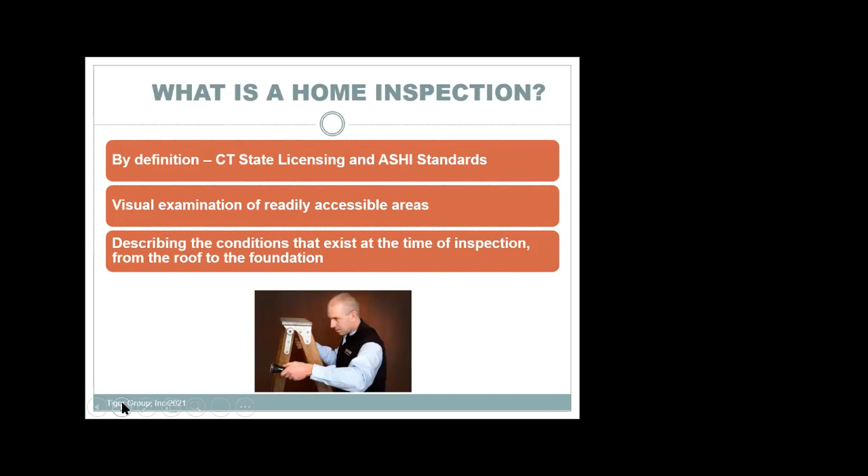So with respect to the home inspection, by definition, our inspections in the state of Connecticut are following the standards that have been put forth by the state of Connecticut, which were adopted from the ASHI standards. ASHI is an acronym for the American Society of Home Inspectors, a professional organization that some inspectors subscribe to.

Obviously, we are conducting a visual examination. Notice that it talks about readily accessible areas. One of the things that you will receive today as part of this presentation at the end is a set of standards for the state of Connecticut. And in that set of standards, there is a glossary that talks about those things like readily accessible areas, which is really important that clients understand because we aren't able to do certain things.

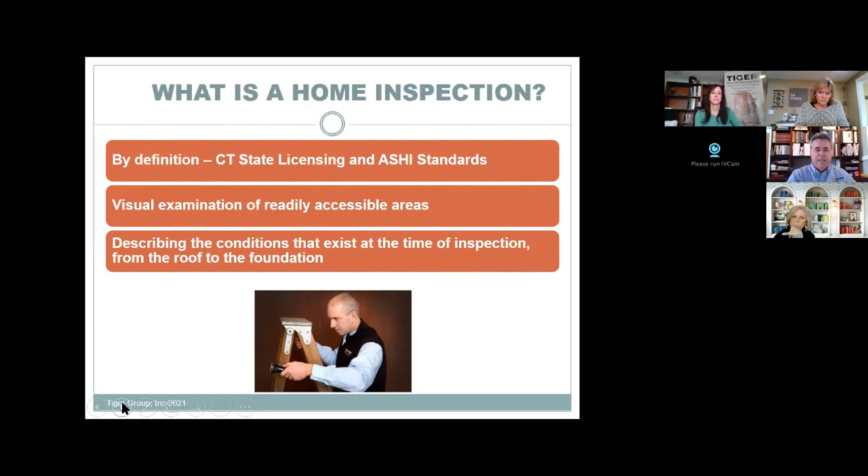I mean, we can tell them what we can see. We can't tell them what we can't see, is what it comes down to. And then obviously we are describing the conditions as they are on the day of the inspection. We do try to anticipate what may happen in the future as part of a normal aging process for a component or a system, but we are really looking at what the conditions are at this point in time for the inspection.

We are regulated just as you are by the Department of Consumer Protection. The goal of the standards is to provide a minimum and uniform standard. So notice it says minimum. You can always do more, right?

It's kind of like the building code. The building code defines what it is that you will do as a minimum to build a house. The inspection standards define what it is as a minimum that you will do for an inspection.

Those standards are required to be provided to a client at the time of the inspection. At Tiger Group, we do send those to our clients in advance so they have an opportunity to look at those. And just as your realtor licensing requires, we have a code of ethics to follow. All of that information will be included in the packet that you'll receive after this seminar today.

So we're here to provide some education for these folks, help them understand how these systems interact. What's the yin and the yang between the air conditioning and the heating system, for example. Talk about where all the controls are. If they have a leak in the house, what are they going to do? That type of thing. Super important for these folks to understand.

We're going to talk about things that are significantly deficient. So again, that's going to go back to that glossary of terms. The state defines what is significantly deficient or at the end of its useful life. And those are really important criteria for us to pass along to our clients.

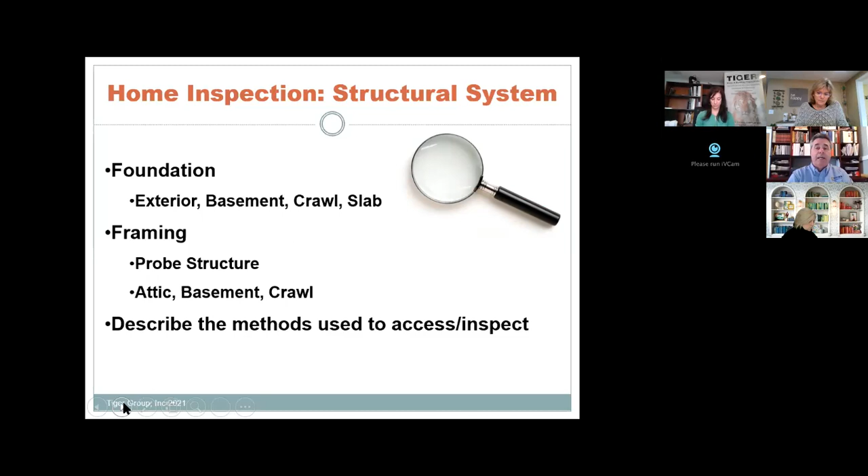It says in the standards, if I'm inspecting a roof, for example, how did I inspect that roof? Did I do it from the ground? Did I do it from a ladder? Was I on the roof? And then I'm required to describe the materials that are in there.

So all of those things are all spelled out for us in the standards. It will speak to all of the exterior components which are listed here. We're going to talk about all the siding, the trim on the building, any of the roof covering or chimneys, porches, deck additions, that type of thing, and anything that's related to the house.

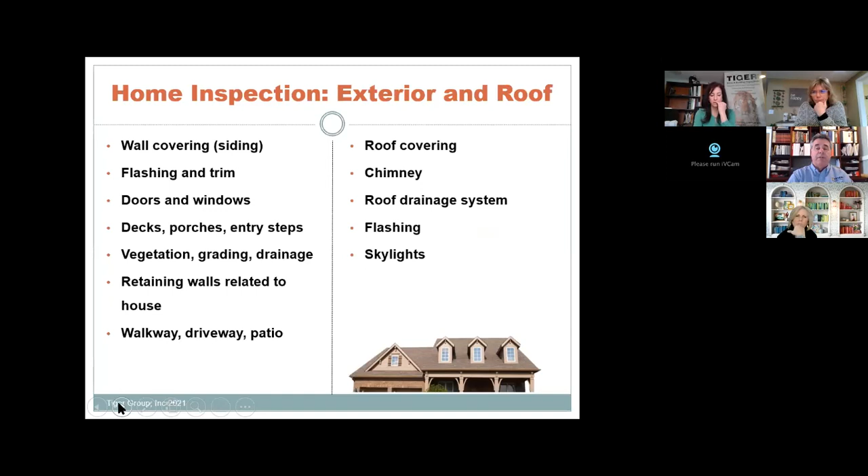So for example, the site drainage as it relates to the house. Now you may have a site drainage issue that doesn't affect the house. That may or may not necessarily be important for home inspection purposes. But if it's a situation where the drainage is a reverse grade situation, for example, and it's creating a problem for the house, then certainly we would speak to that.

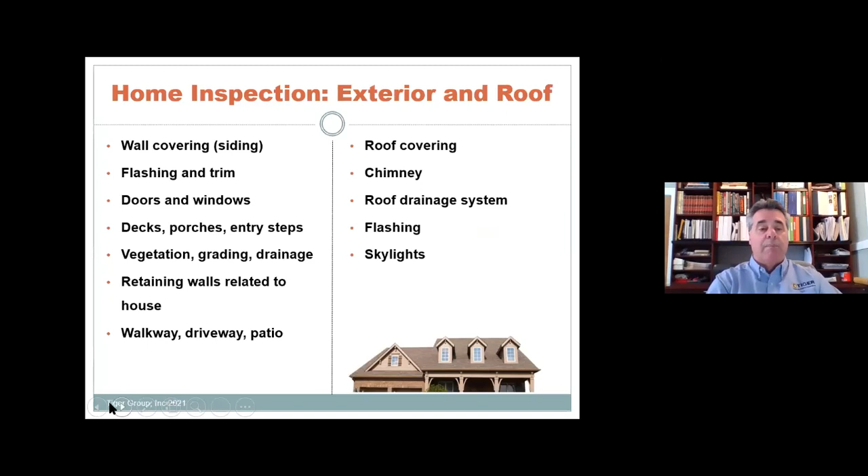Same would be true for a retaining wall. You may have a retaining wall on the property that really doesn't have anything to do with the house, for example. With respect to the systems and components within the house, we're going to talk about the supply and distribution system.

Again, we are required to define some of these things for clients. So what type of water supply system do we have, for example, and waste disposal system? The types of materials that are in the building will be reported as well, as would be the type of water heating equipment, any fuel storage or distribution system.

So for example, are we a natural gas system? Do we have oil tanks? Do we have above ground tanks, below ground tanks, that type of thing. It talks about sump pumps and systems, and obviously we would have as detailed a conversation as we can about that.

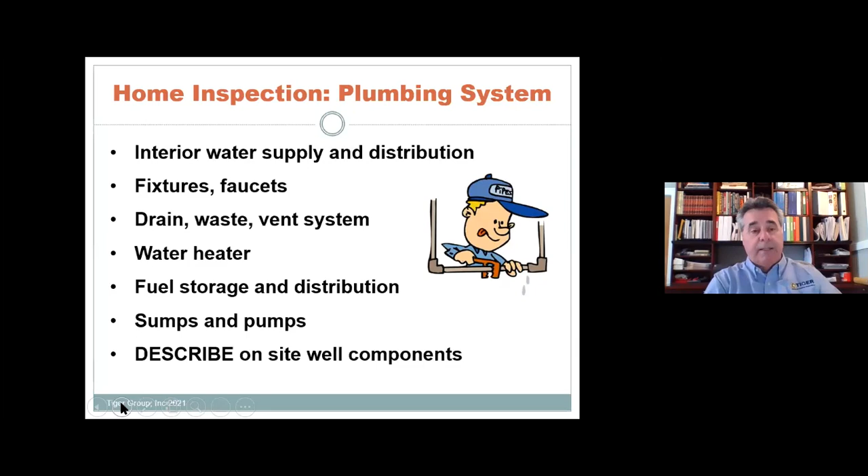And also notice it says to describe the on-site well components. It's interesting because the state really tells us what we're going to inspect versus what we're going to describe. And when it comes to the well equipment system, it really doesn't talk about inspection. It talks about a description. So we have to kind of wade through some of these conversations with our clients.

With respect to the electrical systems, we're basically going to start from the exterior and go right through the building and figure out, okay, from our service entry down to our last switch or receptacle, how do we go through and look at those systems?

Notice it says representative number of fixtures or switches, outlets, and GFCIs in the house. So the standard acknowledges the fact that we may not be able to get to everything in the building. Rest assured, we're going to try to get to whatever we can, but we are inspectors, we're not movers. So if there are things that are in the way, then we're going to talk about that with the client and help them understand the limitations of what we may or may not be able to do.

Also, it speaks to smoke detectors. The standard is very specific with regard to smoke and CO detectors and acknowledges the fact that we really can't verify if these systems are functional. Rather, we're required to identify the presence or absence of them.

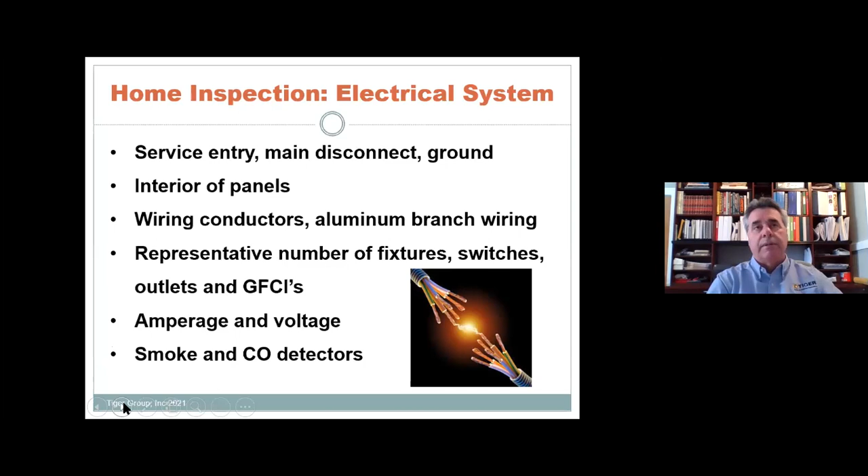And also, with respect to ground fault circuit interrupters, we're required to state whether they're present or absent in areas that we would expect them to be, which would be areas near water. So think exterior of the building, garage, basement, kitchen, bathroom locations, that type of thing.

With respect to the heating and cooling equipment, it talks about installed equipment. So there, for example, we wouldn't be looking at uninstalled equipment, which might be a space heater. I was in a house the other day, it had a plug-in electric fireplace in the house. So that's not an installed system. That's a portable system, which somebody could just pick up and take with them. So that kind of begs a conversation on site as to, okay, what are we doing with this? Is this staying? Would you like me to look at it, not look at it?

With respect to cooling systems, it speaks to central and through wall systems. So that excludes a window installed air conditioner, for example. So we're really kind of parsing that conversation so that people understand what we're doing and not doing.

It speaks about vents, flues, and chimneys, and then it goes on to say that we're not required to inspect the interior of flues and chimneys that are not readily accessible. So the standard acknowledges that we may have some limitations, or there may be some specialized procedures or equipment that would be involved in being able to fully assess that.

We would have that conversation with a client on site. It speaks to the adequacy, distribution, and balance of systems in a house. I was yesterday in a condominium, a townhouse, and we were on the first floor, and I turned on the heat, and it was 67 degrees at the thermostat. We went upstairs, and it was about 75 degrees up there. I'm sure you've experienced that yourself, where certain building styles won't have a balance throughout the house. So we had conversations about what that means to the occupants and their comfort levels, and what strategies they might employ to make adjustments while living in the building. Those are all really important conversations to have with clients.

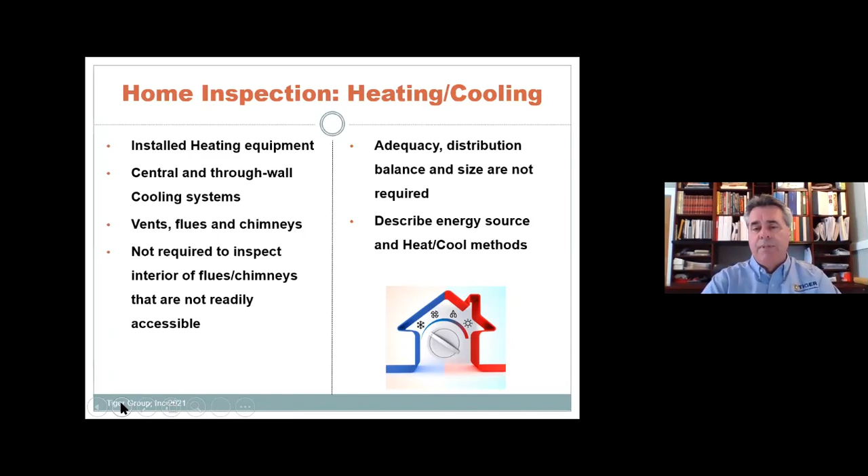We're also required to describe the energy source. Is it natural gas? Is it oil? Is it electric? That type of thing. It may seem somewhat redundant to have some of these conversations, but they're part of the standard, so we need to have them with clients so they understand what we're doing and what we're not doing.

With respect to insulation and ventilation, it speaks to describing the type of insulation we're using in the building, and identifying vapor retarders. It tells us we're not required to move insulation. Sometimes the standards are at odds with each other, which makes it a little confusing for clients who may be reading the standards. So we need to have those conversations and help them understand the intent of the standard.

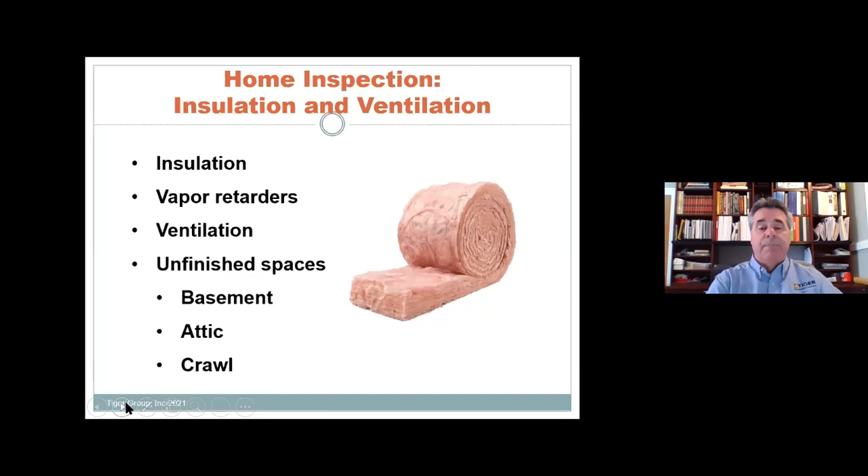It talks about ventilation, and then we're required to look for insulation and ventilation conditions in any unfinished areas, which would be the basement, attic, and crawl space locations.

With respect to the interior locations, we're going through the rooms, looking at windows, doors, outlets, walls, ceilings, floors, going through the individual rooms, and then of course the bathrooms and kitchens, which have additional components like water fixtures or appliances.

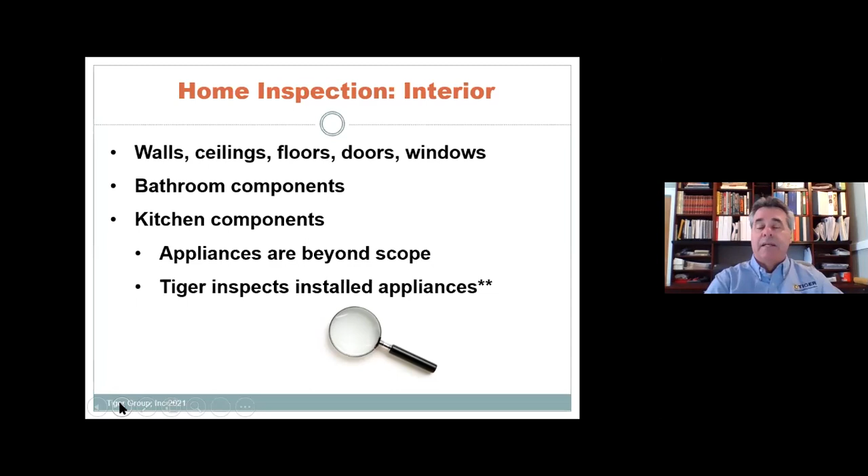With respect to appliances, the standard talks about the fact that appliances are beyond the scope of the inspection, which they are. Again, we'll try to do whatever we can. We do inspect installed appliances, those things bolted to the building, like a dishwasher or a disposer. Laundry equipment and refrigerators aren't necessarily attached to the building, so the standard recognizes those may not be systems that stay with the house—they may be leaving. But again, that's a conversation we can have on site.

Fireplaces, to the degree that we can inspect one—we're able to look at the hearth face, the hearth extension, the firebox, the damper, and part of the smoke chamber, and that's about it. You're not necessarily going to be able to see too far up into the liner assembly, and that's really where our job stops and that of a chimney sweep would begin. So we'd have that conversation with clients.

And then the solid fuel appliances—wood, pellet—and of course gas appliances. We don't have a lot of kerosene systems, but that could be part of this conversation as well. Again, it talks about accessibility, and the requirement, or not required, I should say, to ignite or determine draft or move appliances.

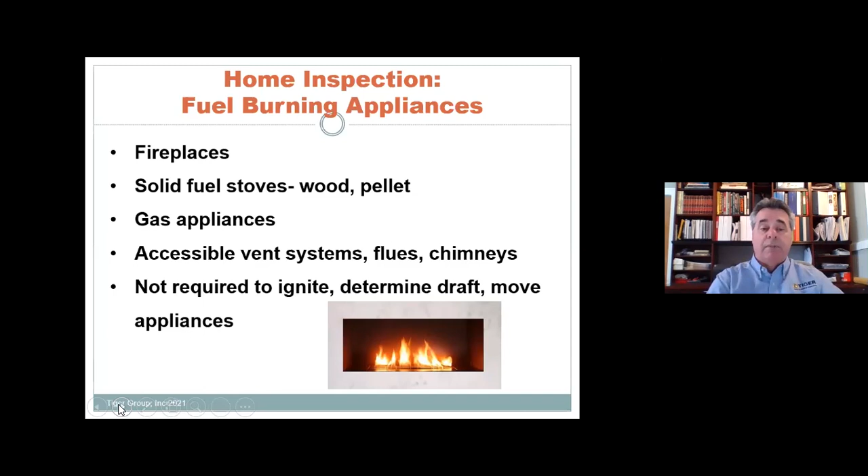Very frequently, and I'm sure many of you have experienced this, you'll go into a house where a gas appliance, or maybe a pellet stove, is not in operation. As inspectors, we're going to inspect it as it sits—we're not necessarily going to light that. If it's something with a simple remote control, we'll absolutely do that, but systems that are shut down we have to approach with caution. We have to remember we're in an unfamiliar environment, and we don't know why that gas valve is shut off for that appliance. So we're not going to take a risk of starting something and perhaps having a problem on site. We're going to report that condition as we find it, and have a client conversation so they understand the limitations of what we can and cannot do. So those are the basic things for the home inspection.

When we get to the wood destroying insect inspection, you'll find that this is not uniform. The wood destroying insect inspection is not part of a home inspection—it's not covered by the home inspection standards.

It's covered by a separate set of standards, and Sue alluded to this earlier. So for purposes of our conversation, a wood destroying insect is going to be a termite, a carpenter ant, a carpenter bee, or a powder post beetle. Those are categorized as reinfesting insects.

The oversight for that licensing-wise is going to be, in the state of Connecticut, a supervisory license. The standard essentially is the same whether you're an individual doing this as part of a home inspection, or if you're doing it as a pest control operator working for a pest control company. The licensing standard is going to be the same. You're going to have a supervisor license, and then you're going to have an operator license. The operators are allowed to do the inspection. They're not necessarily allowed to apply chemicals, and that's the way the program is set up in the state of Connecticut.

So you'll find that some home inspection companies do not do wood destroying insect inspections. Rather, they don't do them at all, or they may have a half measure where they bring a licensed pest control operator with them to do the inspection, or they may just simply say, I'll tell you what I can see, but if I don't see anything, then that's the answer. We've made a decision as an organization that we are inspecting the house anyhow. We are required to know what the structure looks like and determine its condition. So it kind of makes sense to do the wood destroying insect inspection as part of that overall inspection.

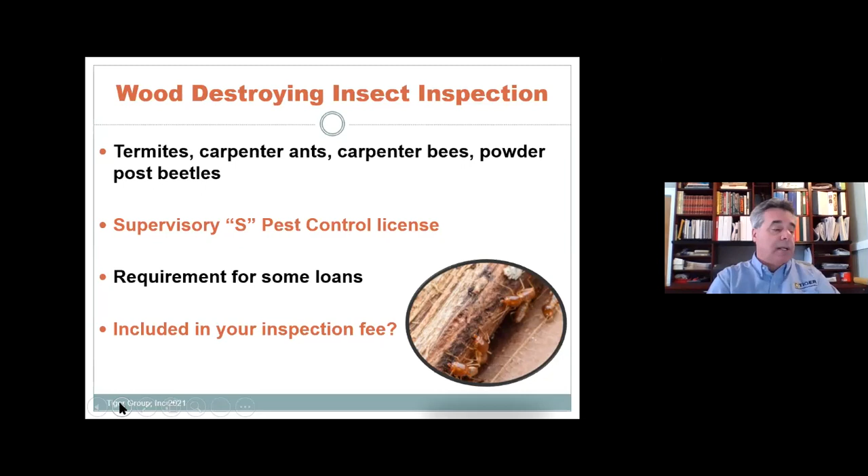The other question would be, is it a requirement for a loan? Well, we don't know the answer to that. Only you and your client would know the answer to that. And then also the question you'd want to ask is, is it included in the inspection fee? Because again, it's not covered by the home inspection standards, so it may or may not be.

So the important parts of the conversation here are that we explain to the client what it is that we're finding, what it means to them, and then give them some direction with regard to: does this particular condition require monitoring? Does it require some action on their part? Is it functionally at the end of its life, or some other way deficient? Those would be important things we would need to go through with them. We're going to talk about simple maintenance things, and we will try to segregate those conversations for clients. And then when it's warranted, we're going to make recommendations for further evaluation.

So when does that come into play? In a lot of people's opinion, too often it comes into play, and I'm kind of on the same table with that. So think of the example I gave you about the fireplace. I can tell you what the exterior fireplace looks like. I can tell you what the exterior of the chimney looks like. I can tell you what the base of the chimney looks like. I can tell you about the fireplace, the firebox, the damper assembly. But there's a whole big part of the inside of that chimney that I can't tell you anything about.

So now I'm looking for clues, right? I'm going to look for some signs that there may be something happening inside that chimney. That may be readily apparent from the exterior, where I may see some cracks or other type of deterioration. Or perhaps in the fireplace, when I open up the damper, maybe there's a level of deterioration or something else happening in there. Those would be the times we would say, legitimately, listen, you need to get somebody else out here to take a look at this and figure out what may be happening at these areas that are not readily accessible at this point.

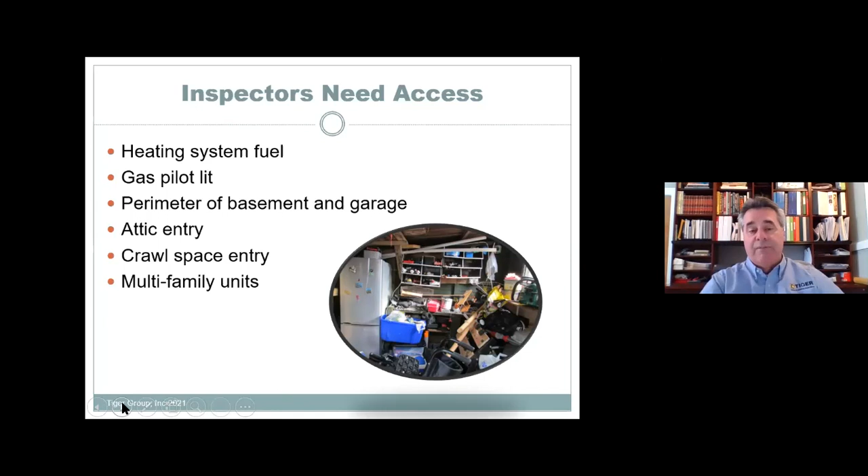Crawl spaces -- I don't know if you have a crawl space in your house, but ask yourself when the last time you were in it. Nobody goes in these places, and there's always all kinds of interesting stuff in there. Then tenant type situations, perhaps, where multifamily houses -- do we have access to all these things? About a shed out in the backyard, some people want to look at a shed. Maybe it's got a lock on it. Those would be important things to take a look at too.

And then, seasonal type situations -- what are we going to be able to do? As you probably already know, we're not going to be able to run air conditioners until probably the end of April, depending upon how the temperatures keep going.

Irrigation systems, maybe the end of March, depending upon when they get them started up. And the same thing would be true for pools.

With respect to snow covered areas, it's not a standard per se, but a company policy where we offer a free return to look at any snow covered areas for clients. We'll have that conversation with them on site and report our requirements to return. We're happy to go back and do a return visit for snow covered areas, provided that somebody calls us and lets us know when it's free of snow.

I got a call the other day from a client who drove by a house, a beautiful, pretty large house, and said there's no snow on the roof so you can go back out and check it. What we ask for is that phone call, and to give us 2-3 days to get out there, because we're not going to schedule that activity specially, we'll work it into our day-to-day activities. I got back out to the property, and yes, the front roof was free of snow. The rear roof had about an inch of ice on it and a few inches of snow still.

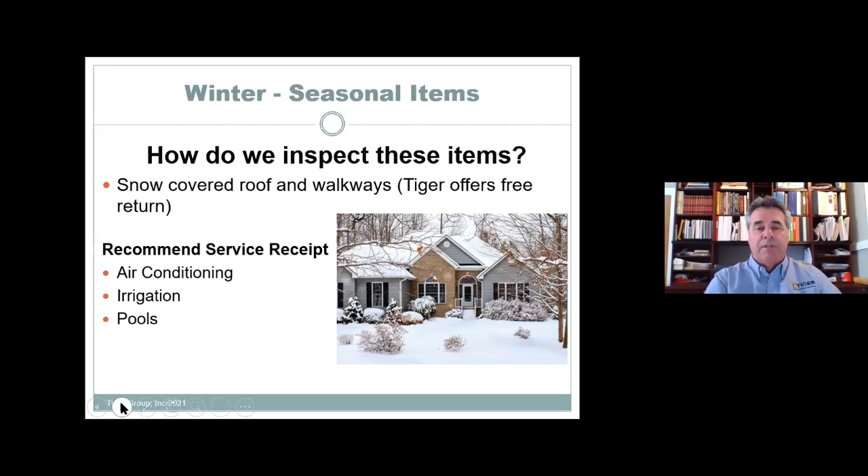Unfortunately, we can't as an organization continue to make return visits to things. So we do ask people to check, because we're happy to go back there, but we can't make multiple visits. Especially now, what's going to happen in the next couple of weeks, folks, we're just going to be as busy as all get out, and we're not going to be able to schedule those things. So the first time is the best time for us to get back out there.

So with regard to limitations, and there are limitations as we just touched on, anything that is not readily accessible, we're going to have some level of limitation to it. We're not going to do any destructive probing or dismantling. We don't own the house, and the client who may be buying the house typically doesn't own the house either, so we can't go in there and create physical damage to the building.

We will probe framing systems where we suspect there may be some deterioration, as part of our wood boring insect inspection, which any pest control operator would do. As we've talked about, we're not going to be able to move things. We can't really tell people what's happening inside a wall. We'll do our level best to help them understand what they may expect to find in there, but we can't see through walls, so we're not going to be able to tell them a whole lot about that.

Entering areas that are unsafe -- I had an inspection the other day, and the agent said, 'Hey Bill, good news, there's a big crawl space for you to get into.' I'm like, fantastic, I love crawl spaces. So I was all ready to go get my respirator and my Tyvek suit. And I said, let me just take a look in there first and see what we're dealing with.

Well, it was an old house, an addition off of an old house that had a stone foundation, and the access they had made was about the size of a basement window, about 5 feet off the ground, and the floor inside the crawl space was about 4 feet off the ground. As you can tell by looking at me, I'm not a young man, so there's going to be limitations as to what I can do in there. In addition, there was a 4-inch sewer pipe going right across the front of the opening that would have otherwise allowed access. And then about 7 decades worth of construction debris, including broken glass from windows, mold on the floor, water, and hanging electrical wires.

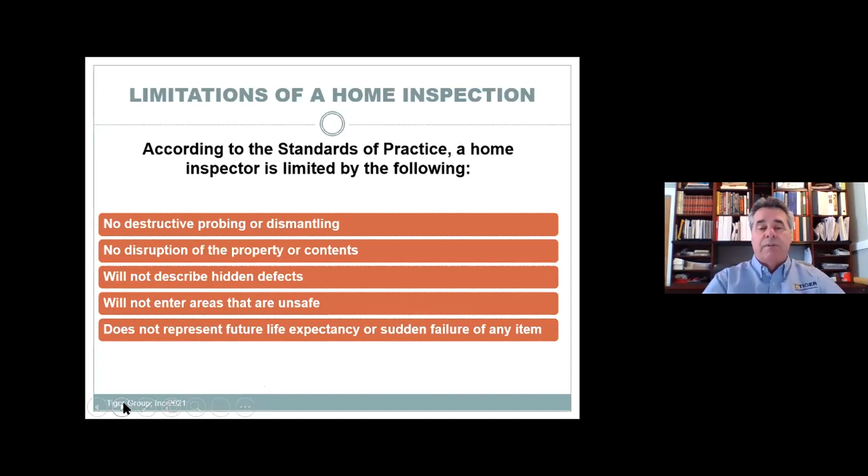And we can help them understand those types of things, but I don't know, as you don't know, when the roof is going to start leaking, for example.

We just touched on the code conversation. We are obviously not providing any type of insurance policy or warranties. We're doing a visual inspection based upon our experience and opinion. And we're not going to talk a lot about cosmetic conditions. We may mention things casually to people that may not be readily apparent to them, but you're not going to see in our reports that there's a stain on the carpet, for example. That's just not part of what home inspection is.

And then again, in keeping with the limitations part of it, think about anything that might be underground. We're not going to be able to tell them a whole lot about that. Any environmental conditions, those are going to be things that would be part of environmental testing. And then, of course, general pests.

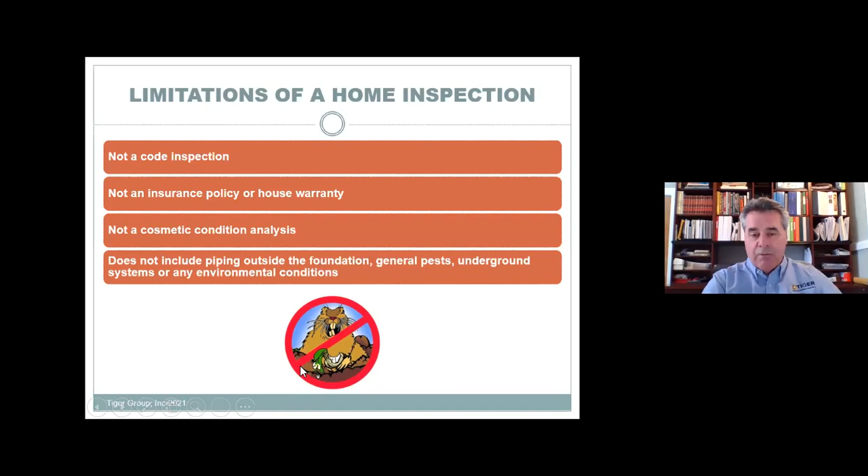You noticed, I think this is a groundhog photo here. I have one underneath my rear porch in case anybody's looking for one. He showed up yesterday. I'll have to deal with that soon, evidently.

In the report, we will, as we talked about, provide the wood boring insect report. We will differentiate between what would be a common maintenance item and those things that might be more significant. We will help people understand that when we have a conversation about something being an upgrade, such as a ground fault protected outlet in a 1960 house, it wasn't a requirement when the house was built. So it's an upgrade for safety, and obviously those are things that we should have conversations about.

The further evaluation, as we touched on, anything that's inaccessible, we will have, just as we're having here now, a conversation throughout the inspection to help people understand, see it, touch it, feel it, read it. It's really the best way to be.

And then at the end of the inspection, we have what we call a kitchen table summary, where we're going to kind of try and gather everybody that's present and talk about what are the important things that you're going to want to deal with as part of your next steps.

There is no standard for written reporting formats, so you will find some differences in there. Our report is really best described as a combination narrative and checklist summary report, which we find works quite well.

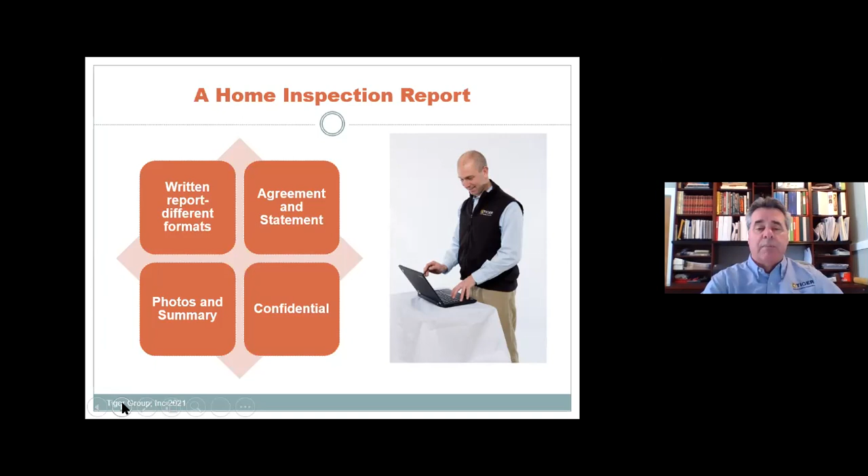We do have an agreement and a statement for clients so that they understand the scope of what we're doing and what they did order for inspections and or tests. And as I mentioned, we do have a summary and we provide photos within the report. Our report product is confidential.

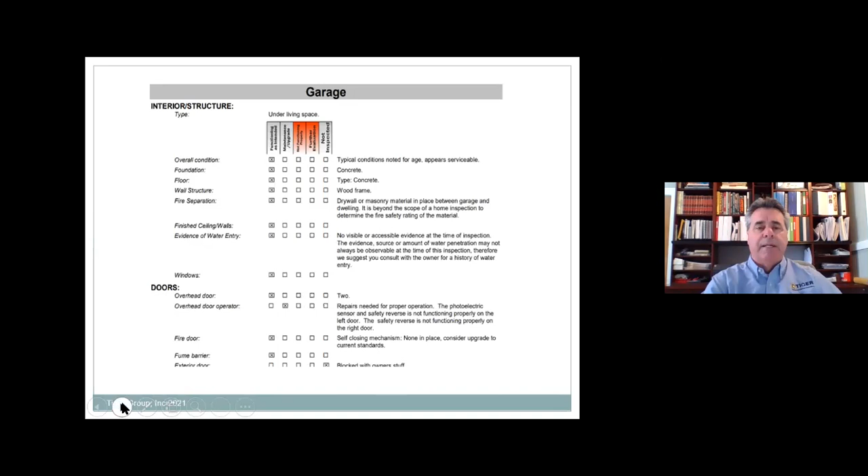So that concludes this part of the section. Do we have any questions, Kara?

We do. The first question is, if you cannot inspect a pool, do you typically leave it blank on the inspection report? So maybe clarify some of that information. Sure. As one of the items that is actually excluded from a home inspection, just like we talked about with the wood boring insect inspection, pools, hot tubs, solar systems, there are ancillary systems in a house that are not covered under the home inspection standards. So we would basically just put a note in the report that says this is not something that we're inspecting, and we do recommend you follow up with a specialist in that particular area of expertise. Great. And just a note on that, we do have pool companies to recommend to you on our website. Yeah, we have contractors in all different areas to help you through that process. Or of course, you could always reach out to Sue or myself for those types of questions.

So how does a client benefit from a pre-sale inspection? So when you say a client, we're talking about a home seller, I'm guessing, because there is benefit to both buyers and sellers in that regard. So with respect to the home seller, going in there and doing a pre-sale inspection, it's going to give them a greater awareness of what is happening in their house and some of the things that they may be able to anticipate that would come up in a buyer's evaluation of the home.

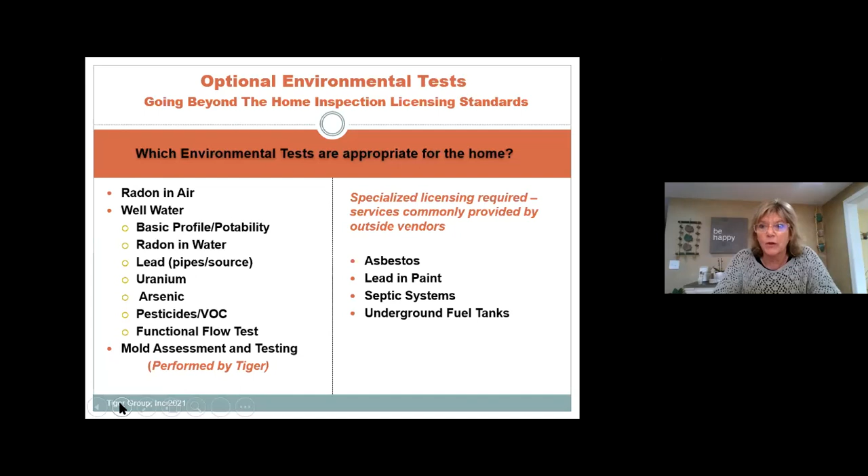Great, okay, moving on. So we're going to touch very briefly on these environmental areas — not something we'll focus on in great detail, but I believe we have a radon seminar coming up next week. Yes, next week, and we can send that invite out with our follow-up email. So if you're interested in that, we can have a much more detailed conversation.

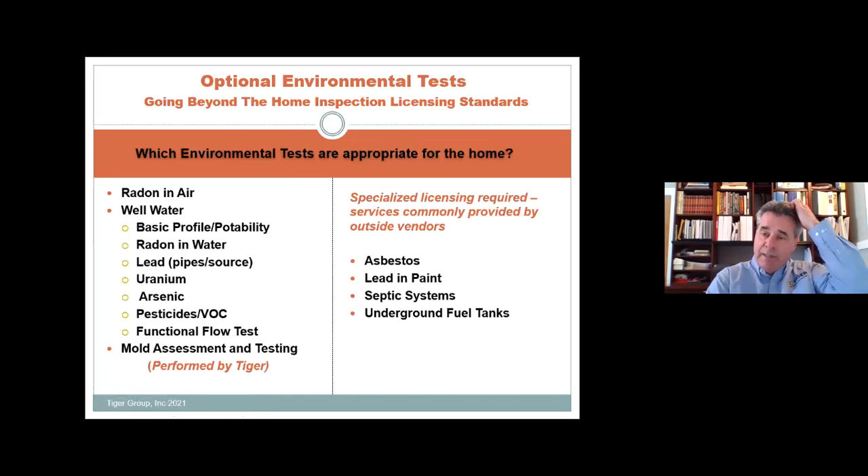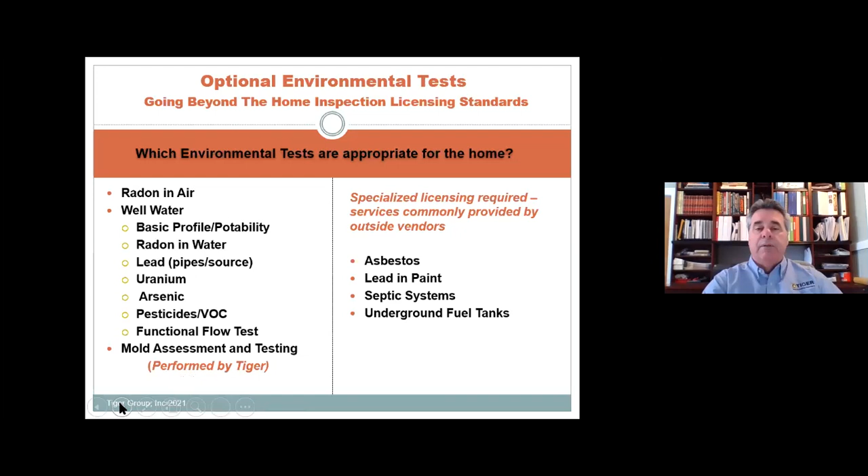Typically we would address the items on the left side of your screen. As part of our extension of service for home inspection, we would do radon air testing, well water testing, and mold assessments. For things we provide via subcontractor relationships, Kara mentioned that we have on our website a contractor network. You can find asbestos, lead, septic, and underground fuel contractors as specialists in those areas, which we would encourage you to do. With regard to radon, again, very basic here, folks.

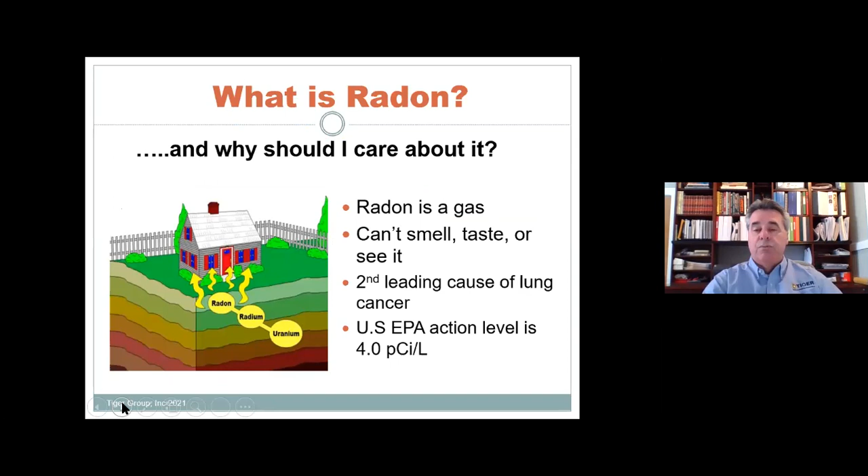Radon is a gas. It's an inert gas. The EPA has said that when we have levels above 4.0 picocuries per liter in our houses, we should undertake some mitigation to remove that. Radon is the second leading cause of lung cancer in the United States.

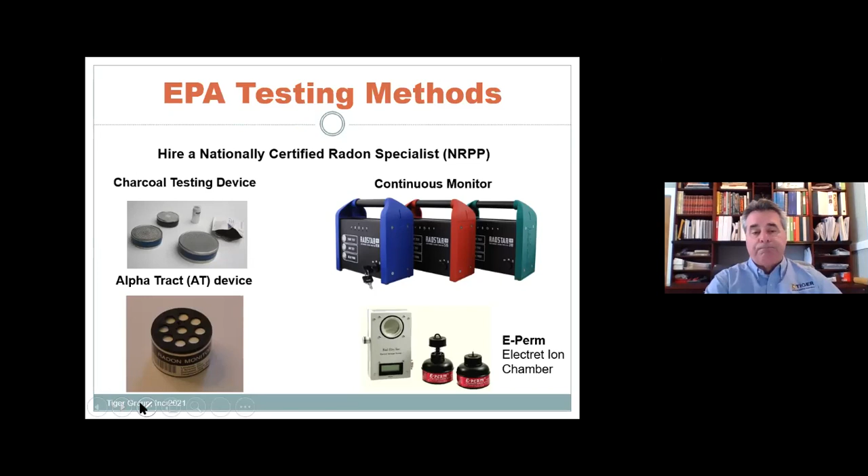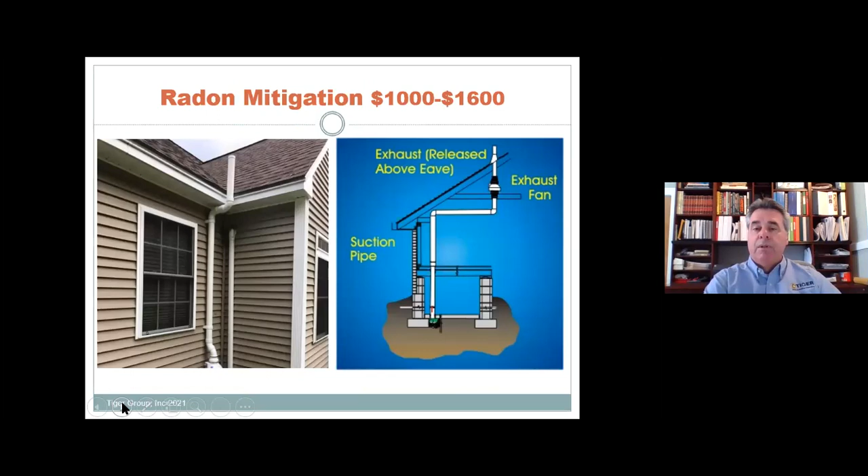There are a variety of different products that can be used to do radon testing. We happen to have continuous monitors, and all of our environmental staff are NRPP certified — that's the National Radon Proficiency Program for radon testing — because we believe it's really important to do it correctly. These are some illustrations of mitigation systems. The one on the left would be one added after the house was built. The one on the right would be an example of a system built out during new construction.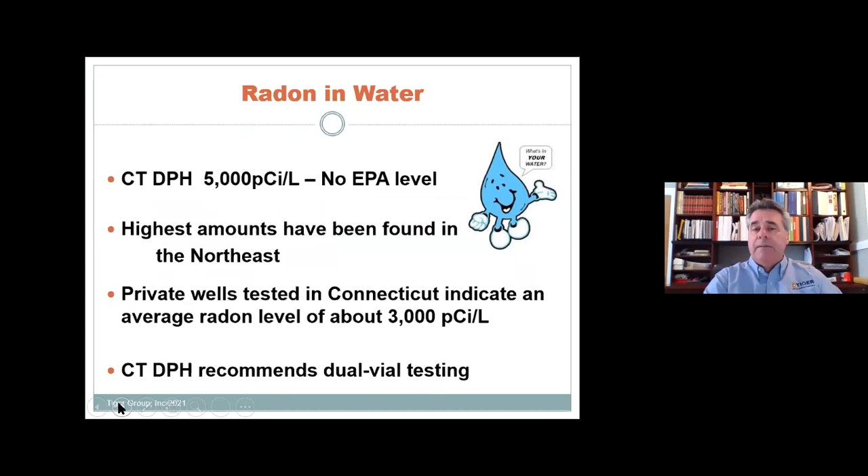With respect to the well water testing that we can do, there are standards to follow. With respect to radon in water, the state of Connecticut has adopted a guideline — not a federal standard, but a guideline — that says if you have levels above 5,000 picocuries per liter in the water, you should have it mitigated. The average in Connecticut is about 3,000, and the state does recommend what's called dual vial testing, so you're doing two tests at once.

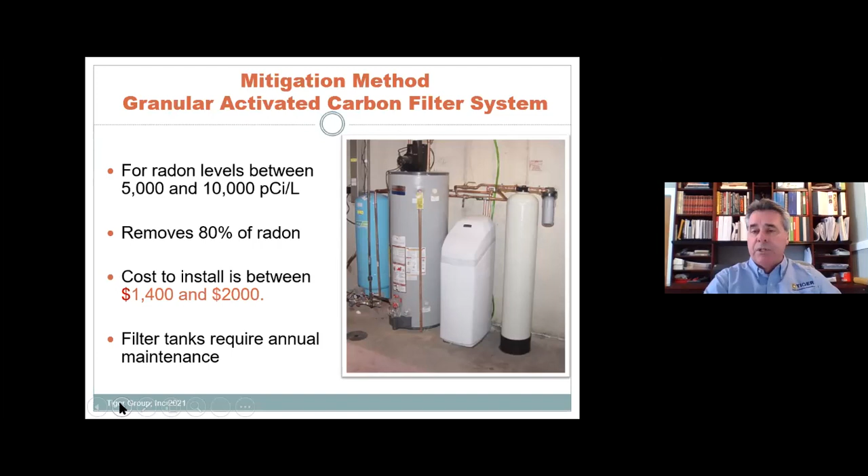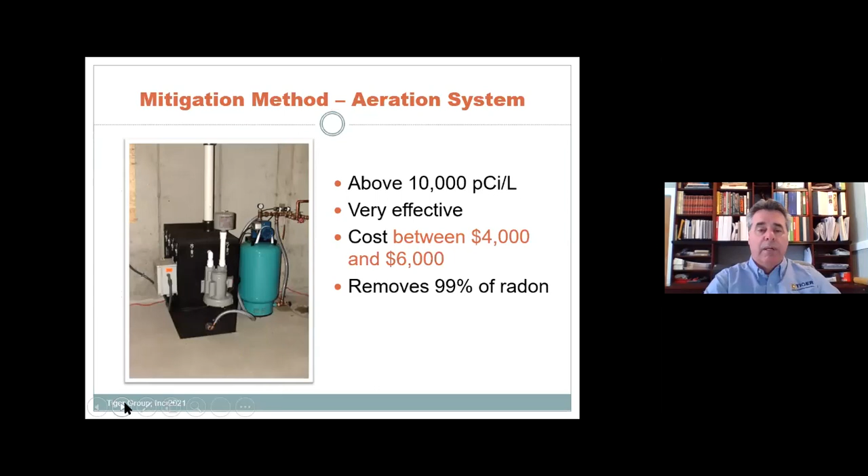The mitigation systems vary based on the levels of radon in water that you have. For low levels, you're talking about a carbon-based system, which is going to be between $1,400 and $2,000. It does require maintenance, as do bubbler systems, which would be used for mitigation levels above 10,000 picocuries per liter in water, and again you're going to be in the $4,000 to $6,000 neighborhood for that.

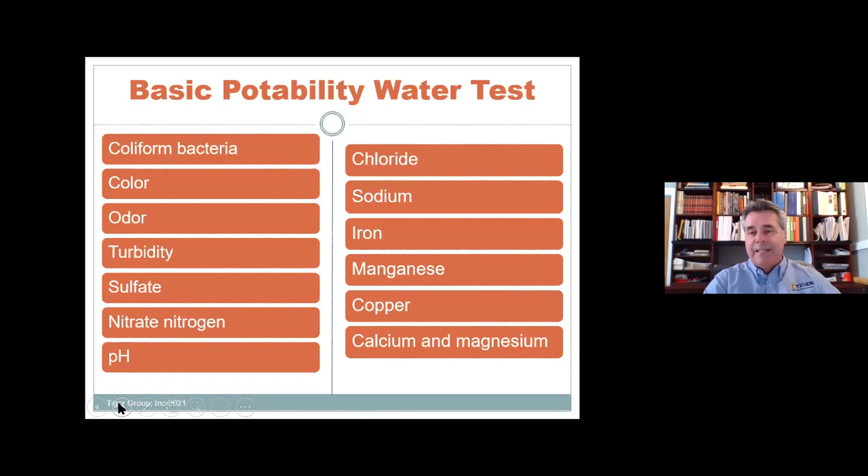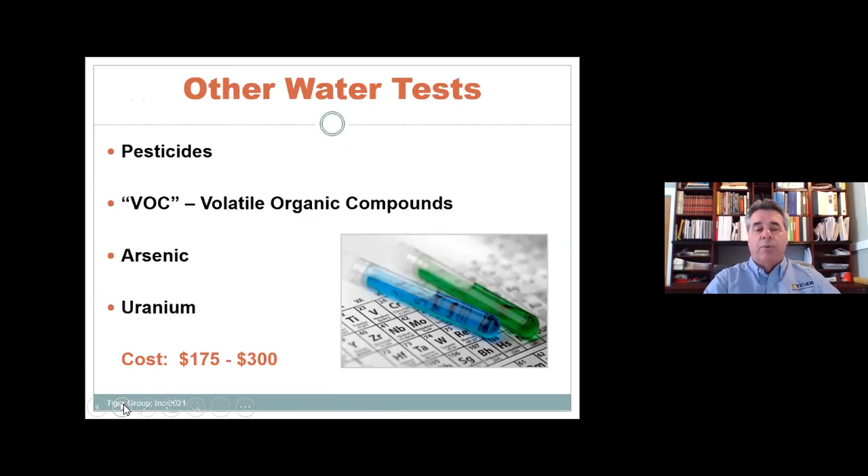All the systems are very effective, they're going to work well. Basic water profile, which includes bacteria and your 12 physical chemical characteristics, is just a standard profile that's really your starting point for waters. And then you can add on to that for pesticides, VOCs, arsenic, or uranium, and there are recommended intervals for all of those.

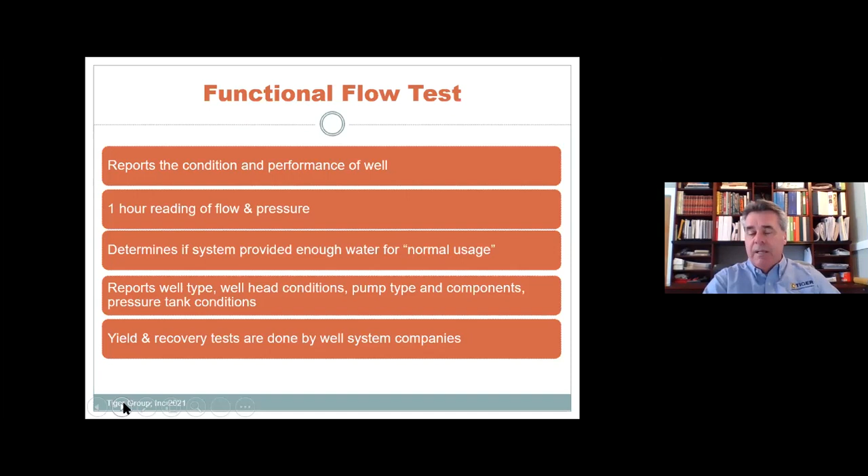With respect to a flow test, we do a flow test, which is not to be confused with a yield or a recovery test. Those are tests that are much more invasive, but a flow test is a measurement of the water output over the course of an hour to look at how the equipment is operating and make judgments as to the amount of water that it's putting out. This is a kind of baseline evaluation, as are all of the water tests, to let people know if they need to do something further.

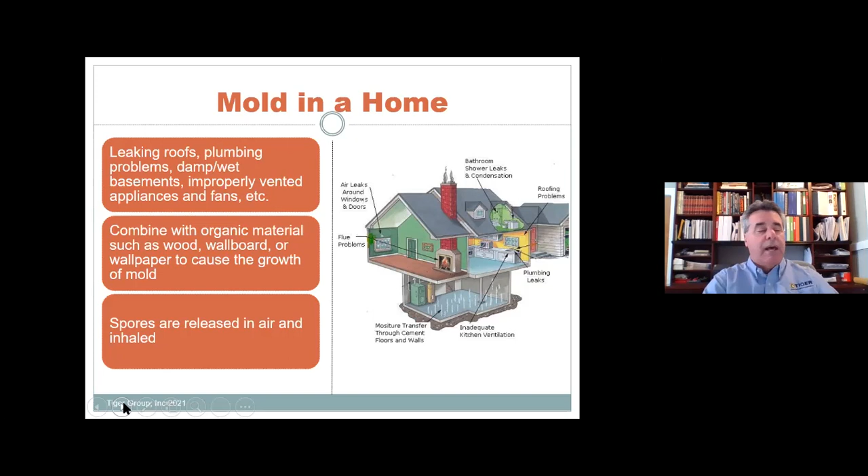And then basic mold assessments - of course, anywhere where you have water getting inside of a building or leaking inside of a building, or humidity levels that are not being controlled, you have the potential to have mold inside of a house.

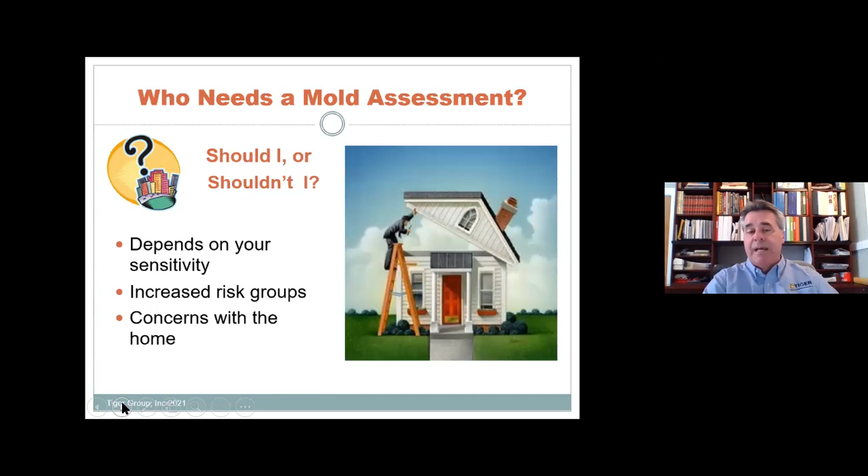Obviously everybody has to make their own determination as to whether or not that's something that's important to them. Are they in a group of people that have some type of immunocompromised system issues? They have a particular sensitivity or perhaps an allergy type situation, or maybe something happened in the house before where they saw something related to water or moisture control issues. So you'd want to have somebody come do a mold assessment, take some air quality readings, potentially take some lift samples of suspected areas where there's mold, and then provide a report for that purpose.

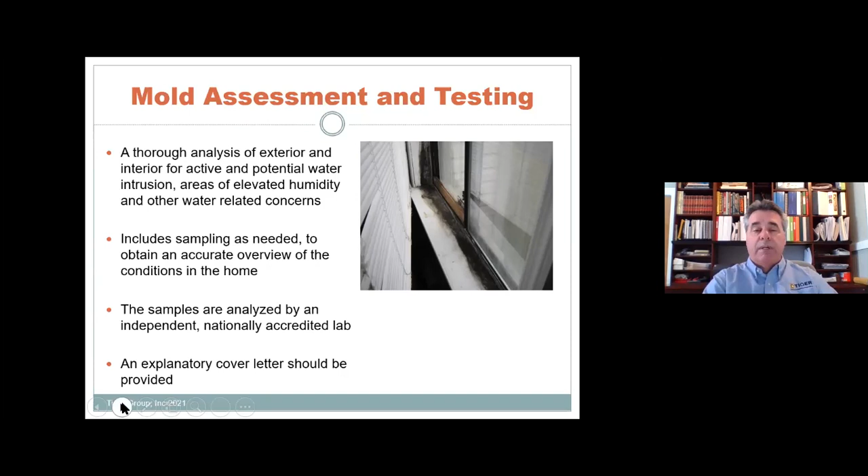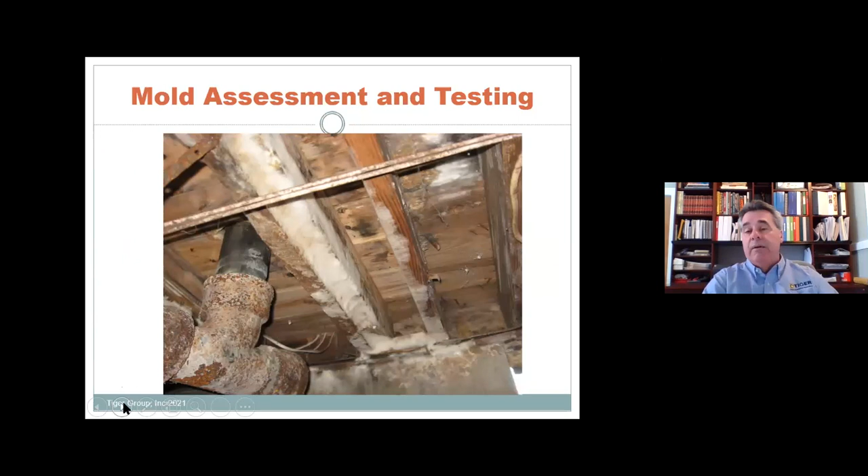Examples of mold, most commonly we see it up in attic areas and in basement areas. And then of course, any area where there's been a leak and potentially sheetrock - that's where you're going to be able to have those conditions.

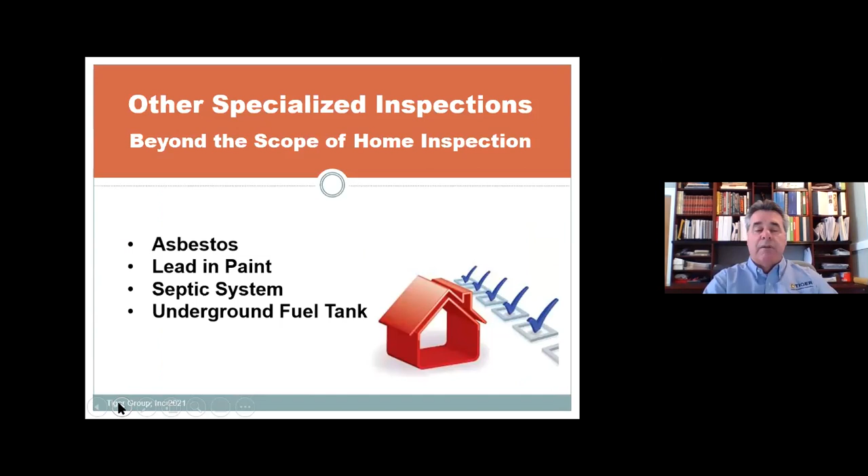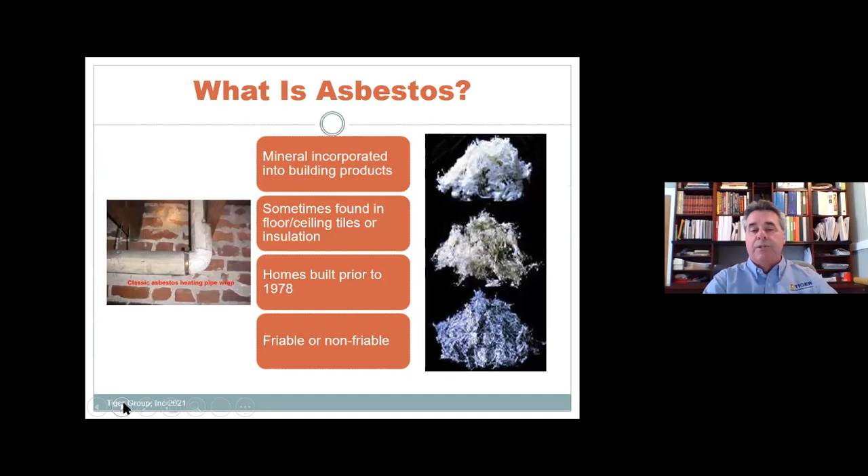As we mentioned earlier, these other specialized inspections would kind of fall into a subcontractor conversation. Asbestos materials, for example - you can find hundreds of materials in buildings that could have asbestos in them. When we find them as home inspectors, because it is beyond the scope of our inspection, we're going to talk about suspected areas and make a recommendation. We are not specifically looking for it, but frankly, if we come across it, we can't unsee it, so we're going to talk about it.

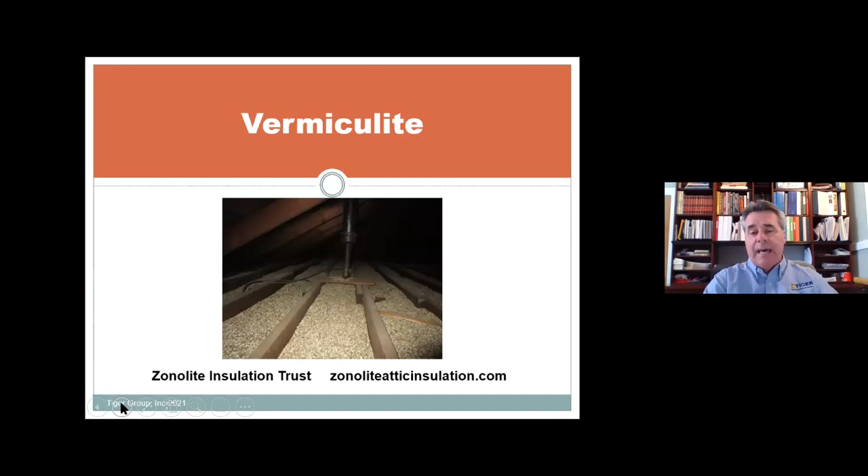One of the more recent conversations with asbestos has to do with vermiculite. Vermiculite, if you don't know it, is a granular insulation, most commonly found in attics, but it can be in the walls of houses as well. I would encourage you to go onto this website, which will be reiterated in the information you get from us later - the Zonolite Insulation Trust group.

There is some class action lawsuit money that's been made available for folks, and I think you should, as real estate professionals, know about that if you don't already.

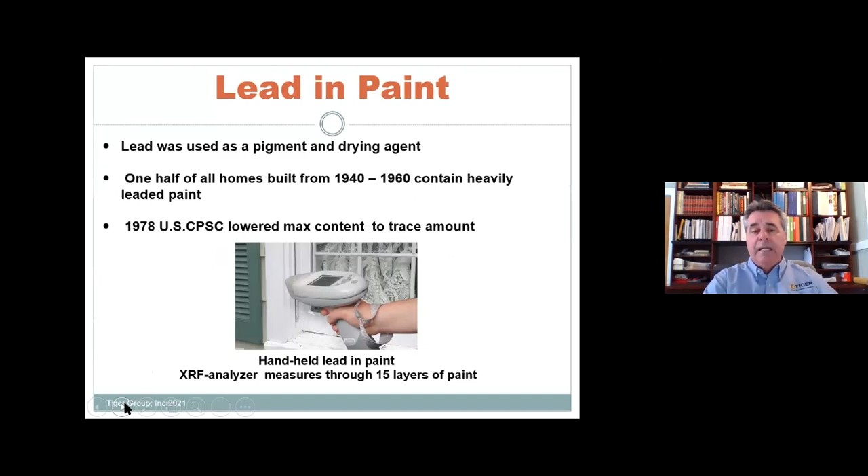With respect to lead, as you can see here, pretty much any house that's built prior to the late 70s can have lead in it. And certainly, when we're going through a house, if we see any areas where we have suspected concerns based on the age of the house and the condition of the paint, then we would speak to that.

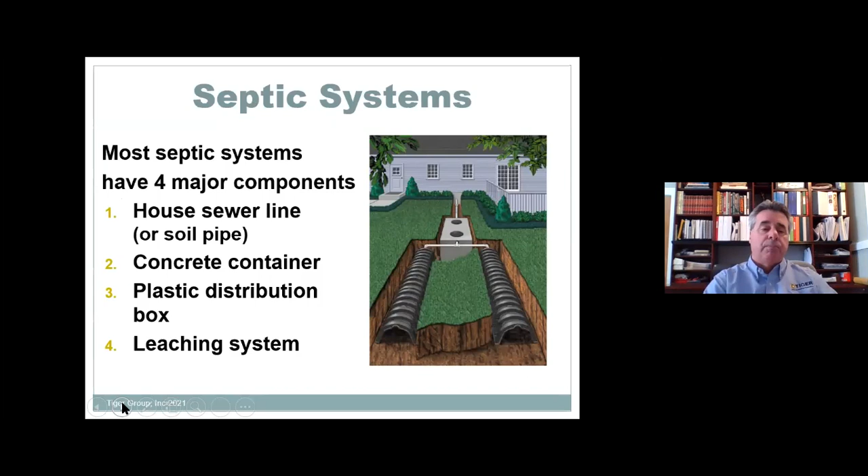We don't really get involved in septic systems other than essentially we're running a lot of water in the house. If we do experience any slow drain situations or backups, or if we're out in the yard and we see any evidence of any breakout type conditions, then obviously we would refer you to a septic contractor. But we find, frankly, in most cases that's already been dealt with by the time we get there. But we do have a list if needed.

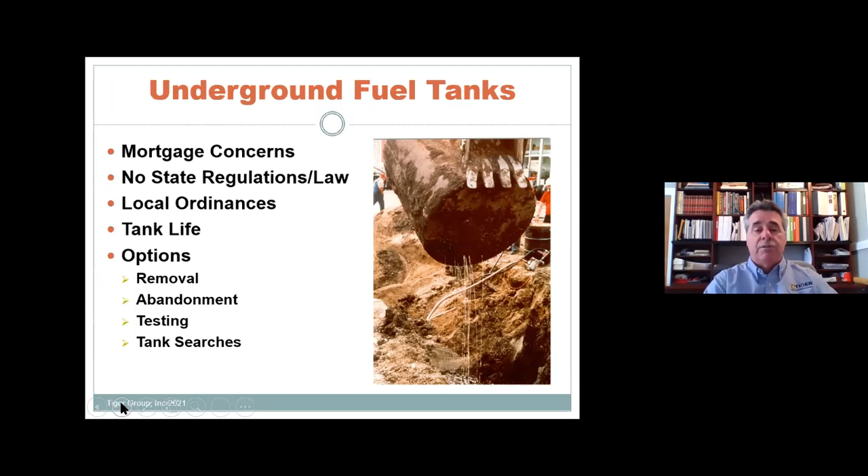And then, of course, underground storage tanks. At this point in time, all of these environmental issues are becoming less of an issue as the years go by. But two days ago, I was in a house and I found underground fuel tank lines in the basement, so you never really know what you're going to find. But there are no state regulations with respect to that, and again, we do have access to contractors on our network.

Any questions that we have, Kara? Yes - do inspections for classic or older homes, antique homes, really differ? If so, can you do a class on this? We do have a class on this, so we can brush that up and may have that be one of our monthly seminars.

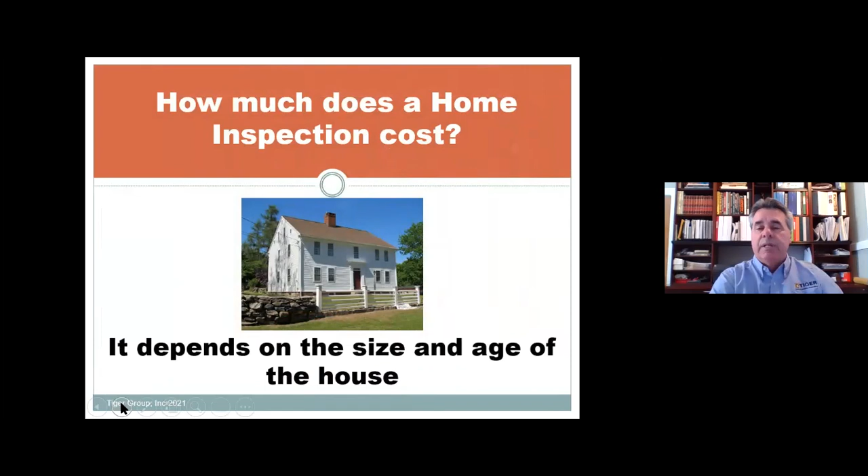So what does a home inspection cost? Well, it's really going to be a function of the size of the house, the age of the house, and the complexity of it. But you're going to be between $500 and $700 typically.

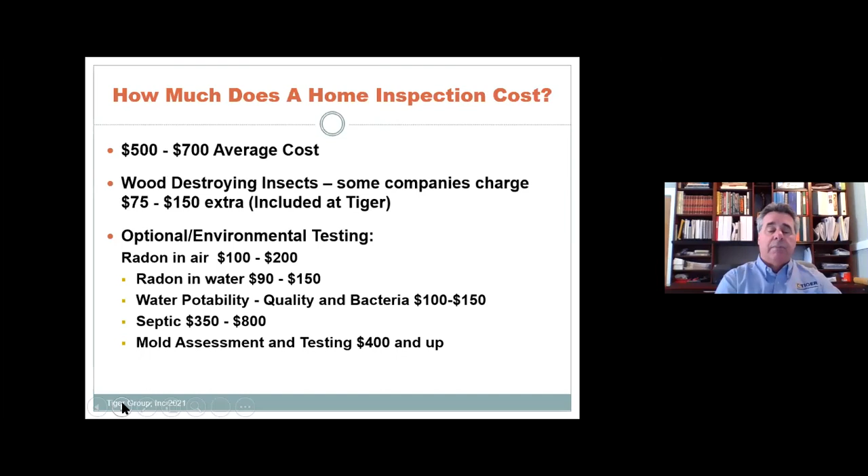Again, is the wood destroying insect inspection going to be included or extra? And then you're going to have some optional testing prices that, again, we're giving you some ranges here that are going to vary from company to company. So you probably should do your due diligence on those conversations.

We encourage people to participate, we encourage people to come with questions. We want it to be conversational. We want them to really walk away from this having a really great experience and saying, wow, I really learned a lot about the house today.

We're still in COVID times here. I know it's an exciting time for people and they want to have friends and family and all this stuff involved, but we really still need to continue to try and minimize the amount of people on site. It's really important to be able to be comfortable and move through the house.

Want to make sure that the inspector or inspection company you're dealing with is licensed and insured. Insurance is not a requirement for the state of Connecticut, so it's important to ask those questions.

Want to make sure that they're a full service company that has a staff that's going to be knowledgeable to answer questions, to be able to do their environmental tests where possible, and certainly those folks that are adhering to the standards and are well experienced as well.

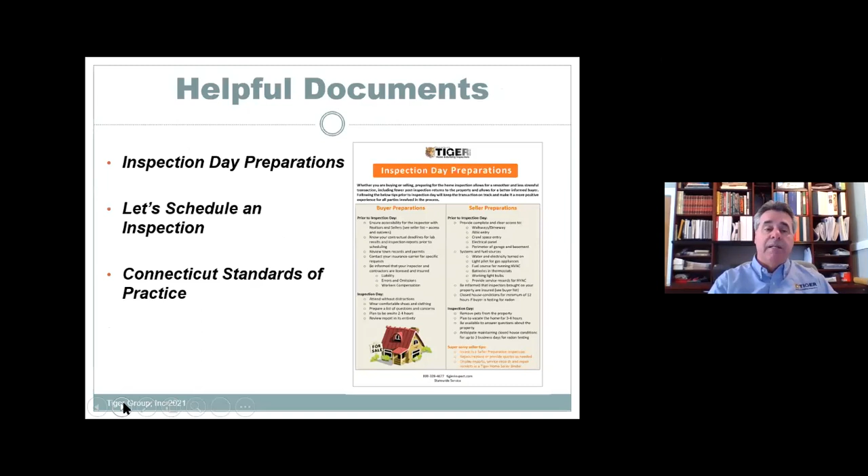As part of the follow-up today, you're going to receive some documentation. This one here talks about inspection day preparations. We have some guidance on the types of questions that clients may need to answer to be able to schedule an inspection. And as I mentioned earlier, we'll have the Connecticut standards in there as well.

Our contact information is provided here, and we're certainly happy to help you in any way that we can. I am happy to answer any technical questions that you have at any time. Feel free to shoot me an email. I field lots of questions on a regular basis, and that's what I'm here for. I'm happy to do it.